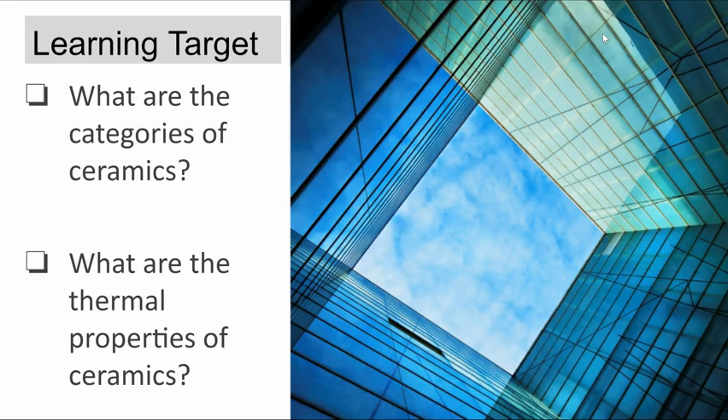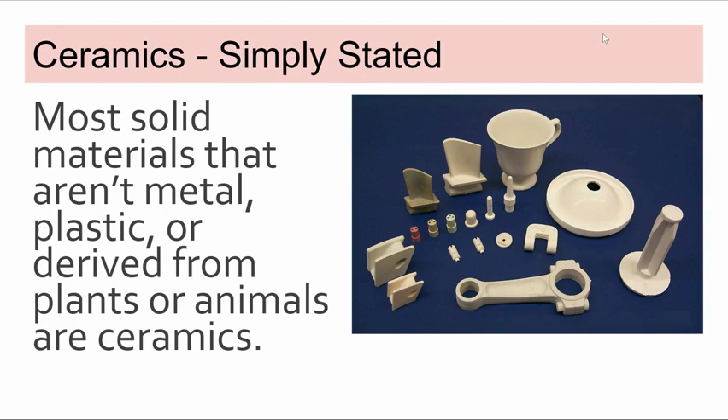So, what is a ceramic? Simply stated, the definition of a ceramic is a solid material that is not a metal, a plastic, or derived from plants or animals. So, ceramics are a vast category of materials, and interestingly, we define them by what they are not.

So, refractories are heat resistant materials that are used for lining the high temperature furnaces and reactors. A great example of a refractory surface is the inside of an airplane engine. The combustion chamber of an airplane engine temperature often exceeds 900 Celsius or 1,650 degrees Fahrenheit. What's crazy about that is that's higher than the melting point of the nickel alloy that is used to make the blades within the engine.

So, how can you have something that has a melting point below the temperature at which the engine operates? Wouldn't the blades of the engine melt? And it is a ceramic coating on the blade, as well as cooling channels cut into the blade that allow it to operate. The blades actually operate in an environment several hundred degrees hotter than the melting point of the nickel alloy. But because of the cooling mechanisms, the metal is never above its melting point, even though the environment is. And so, one of the things we're going to look at is the tremendous low thermal conductivity of ceramics, which makes them really good for the linings of furnaces, reactors, and engines.

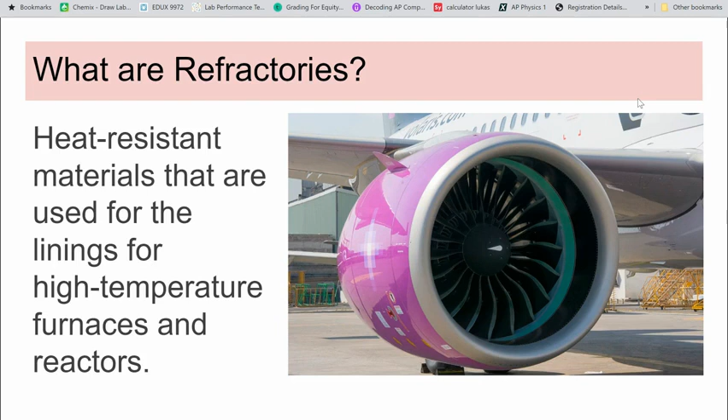Abrasives are ceramics that are used to smooth, polish, and grind materials. So, sandpaper is a common ceramic abrasive. And as the video discussed earlier, the fact that ceramics are incredibly hard is what makes them excellent abrasives. Ceramics and glasses are the hardest type of any solid material. Many ceramics are used as abrasives in cutting, grinding, and polishing, and that is because their hardness is really high. Unlike metals, it's really difficult for dislocations to move through the atomic lattice. And that is because of the ordered bonding between the atoms in ceramics.

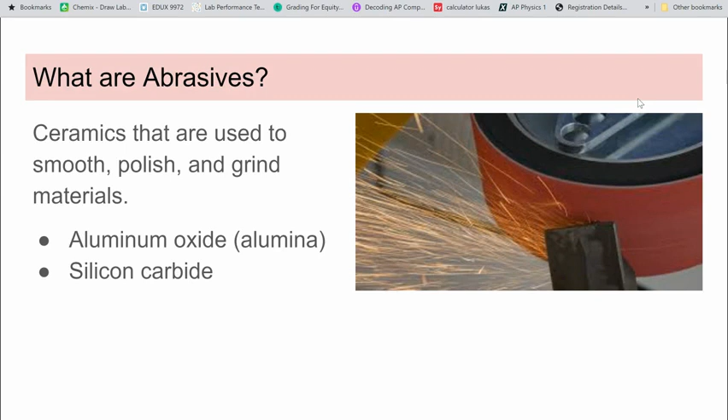So let's look at the bonding that occurs in ceramics. Ceramic materials can often contain both ionic and covalent bonds. If we remember from our previous semester, covalent is when electrons are shared, whereas ionic is when the electrons are transferred from one atom to another.

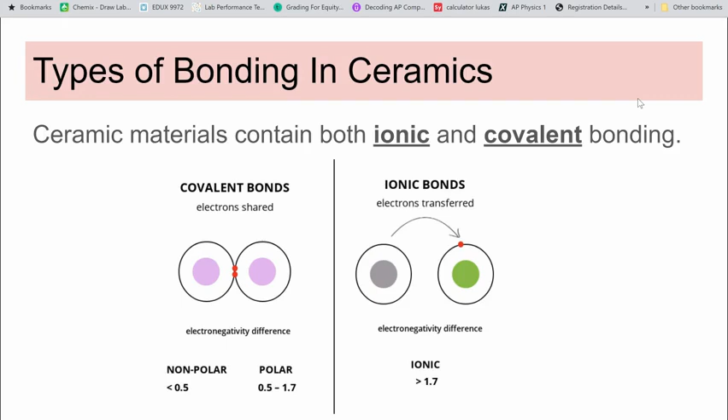And the bond force determines the properties of the ceramic material. When two atoms are far apart, there's an attractive force, and that increases as they get closer. When the atoms get so close that their electron cloud starts to overlap, there's a repulsive force that prevents them from getting any closer together, as shown in the diagram on the left. So the stronger the bond force is between the atoms in a ceramic, the higher your elastic modulus will be, the higher the melting point of the ceramic will be, and it will affect the thermal conductivity, the ability to transmit heat energy through the material, and make it very low.

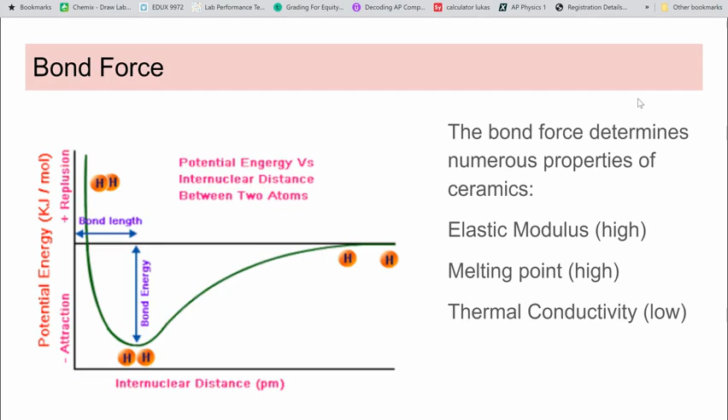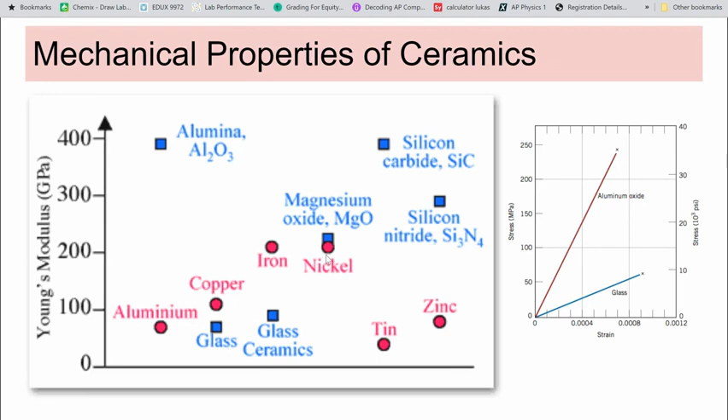So if we look at the mechanical properties of ceramics, we can see that our standard metals, aluminum, copper, iron, and nickel, tin and zinc fall here, and our ceramic material, alumina, magnesium oxide, silicon nitride, and silicon carbide are above it in terms of where they land on the stress strain curve, their Young's modulus value. However, if we look at glass and glass ceramics, we can see that they're in a similar place in terms of stiffness to many of the metals that we've looked at previously. However, they are not as strong as other ceramics.

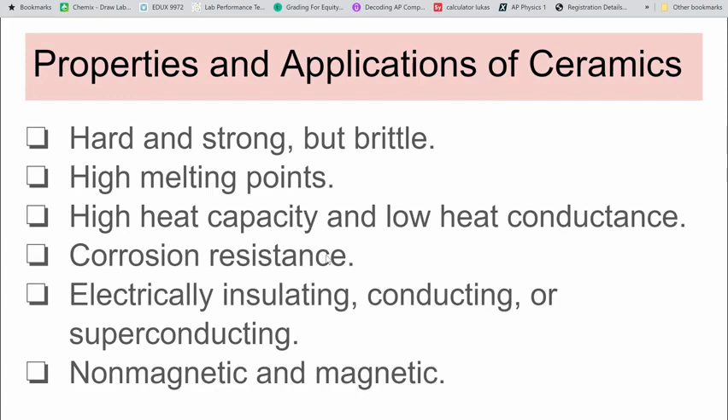So in general, the properties of ceramics are that they are hard and strong, but very brittle. They have high melting points. They have a high heat capacity and a low heat conductance. They're corrosion resistant, and they can be either electrically insulating, conducting, or superconducting, and either magnetic or non-magnetic.

Ceramic materials can be either crystalline or amorphous. Rapid cooling of ceramics favors amorphous, since time isn't allowed for the crystal structure and the orderly arrangement to form. And if a ceramic material is amorphous, that's going to determine the properties that we see.

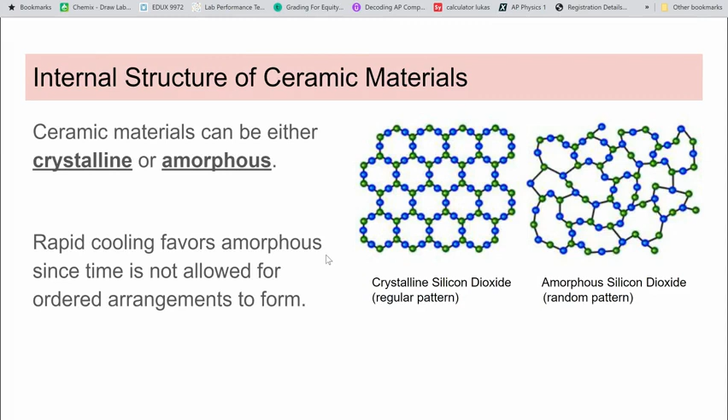And if a ceramic material is amorphous, they tend to have fractures occur in this conchoidal pattern. So amorphous ceramic materials tend to be brittle, and they break or fracture in a way that doesn't follow any natural planes of separation, creating these conchoidal fractures. And that is due to the lack of a structured crystal atomic lattice.

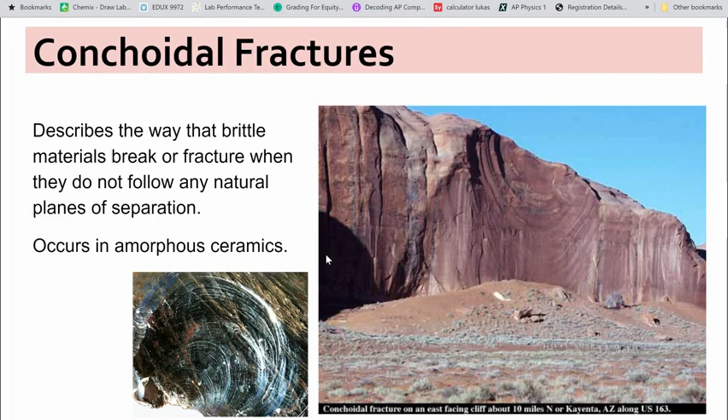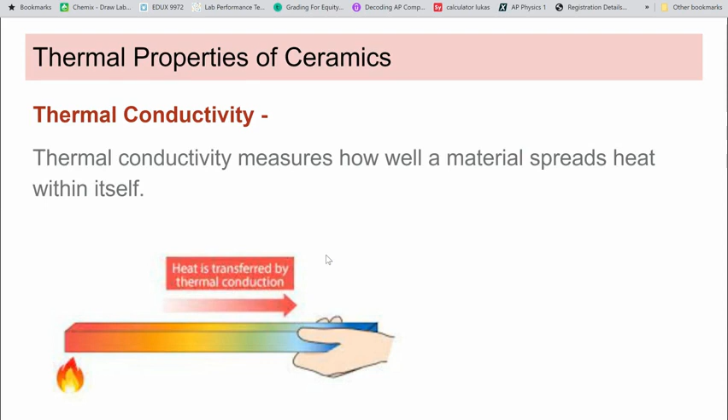So, thermal conductivity in a ceramic measures how a material spreads heat within itself. So we're looking at how heat energy can move through the material when we're looking at thermal conductivity. And if you remember in class, we did a demonstration where we put equal amounts of heat energy on an aluminum rod and an alumina rod. An aluminum rod is metal, alumina is a ceramic material, and we had placed various crayons at each of these numbered spots on those rods to see the rate at which the crayons melted and fell off over time.

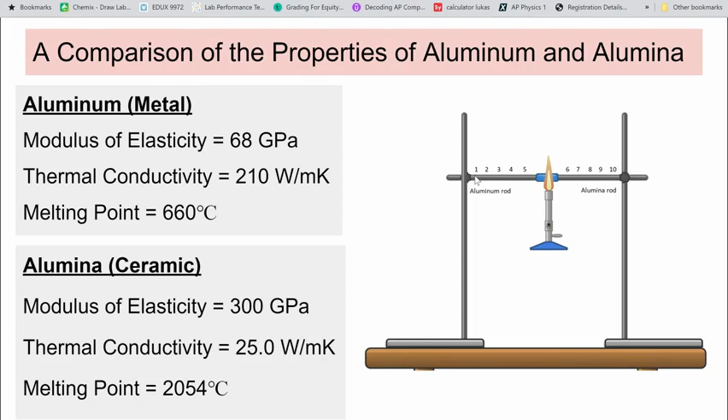And if you remember in our demo, all of the crayons, all the way back to position 1, fell off the aluminum rod because metals conduct heat very well. They're great conductors. Whereas the first crayon at position 6 on the alumina rod never fell off, even after crayon number 1 fell off. And that is because ceramics are very poor conductors of heat energy. They have a low thermal conductivity, which makes them a great insulating material used for things like refractories, furnaces, or engines.

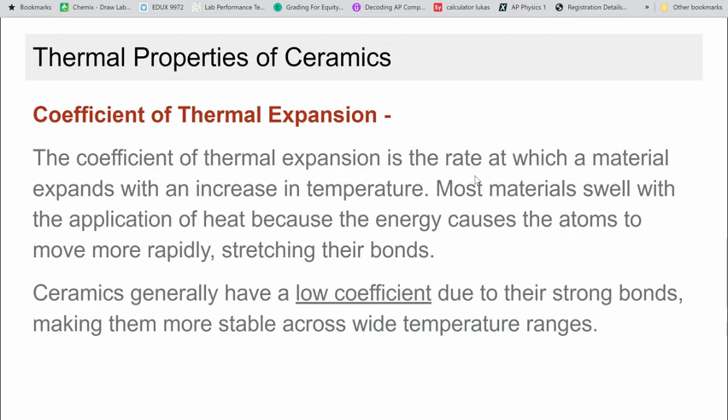So the coefficient of thermal expansion is the rate at which a material expands with an increase in temperature. Most materials swell with the application of heat because energy is causing the atoms to move more rapidly, stretching their bonds. Ceramics generally have a low coefficient due to their strong bonds. That makes them more stable across wider temperature ranges.

If we look at the coefficient of thermal expansion, we can see various materials and their coefficient of thermal expansion, or how much they will expand or swell as heat energy is added to them. And you can see comparison to a couple of metals that we've previously studied, steel and aluminum. So steel and aluminum swell significantly compared to ceramics with the same amount of heat energy input.

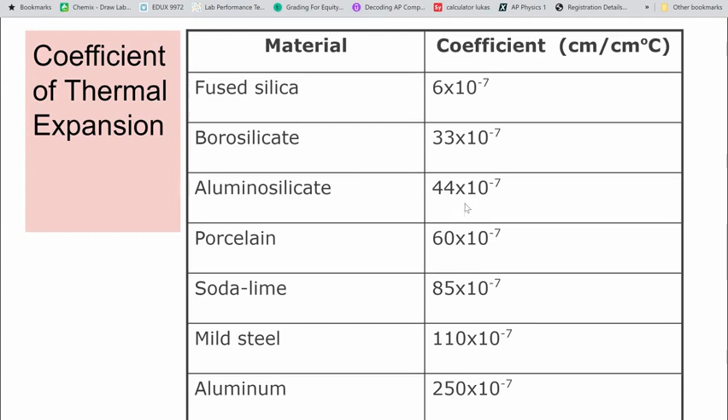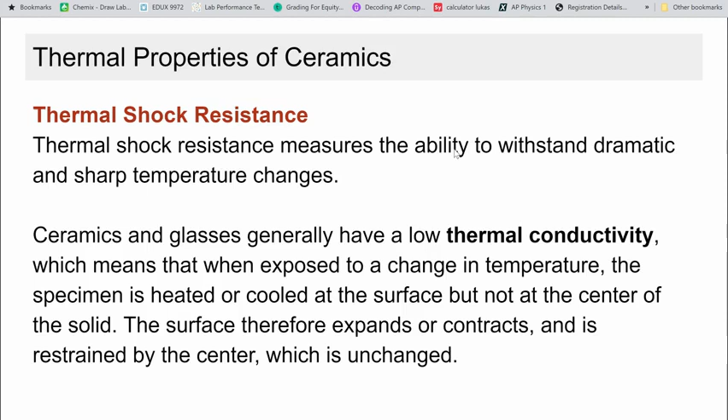Thermal shock resistance is the ability to withstand dramatic and sharp temperature changes. Ceramics and glasses generally have a low thermal conductivity. So what that means is when they're exposed to a rapid change in temperature, the specimen is heated or cooled at the surface, but because the thermal conductivity is not good, it doesn't change the center of the solid. Therefore, the surface of the material expands or contracts and is restrained by the center, which is unchanged. This is why ceramics, if exposed to wide, fast changes in temperature, often become brittle and break.

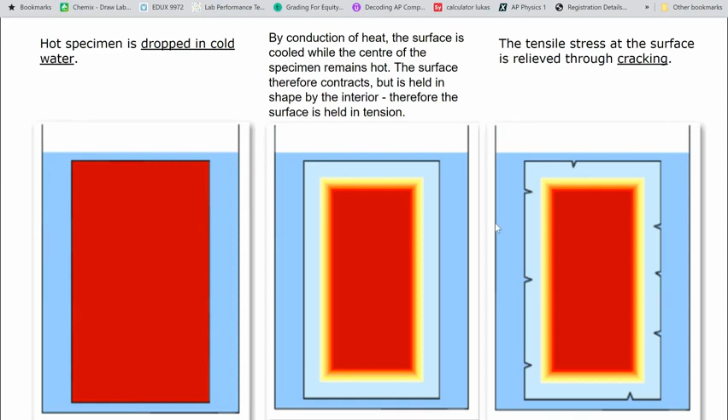So if we look at an example of that, if a hot specimen is dropped into cold water, then the conduction of heat is going to cool the outer material, but because ceramics have a low thermal conductivity, the inner material is going to stay warmer. And therefore, the surface is going to be held in tension. And tensile stress at the surface is relieved through cracking, through the brittle nature of the ceramic.

So to test thermal shock resistance, you simply take a ceramic and heat it to progressively higher temperatures and then drop it into cold water. And we're looking at the maximum temperature that the ceramic can survive before it starts to become brittle and eventually break, right? So spark plugs in your car can suffer thermal shock when the engine is started.

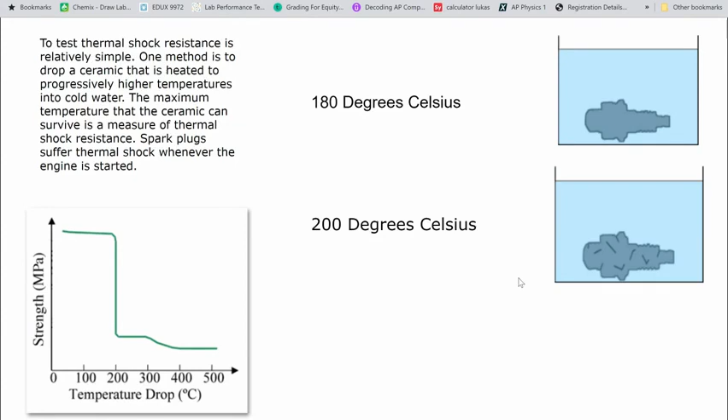And we can see with a spark plug, if we heat it up to 180 degrees and drop it into cold water, we see no signs of thermal shock. But at 200 degrees, we're starting to see that tension being relieved through cracking at the surface. And if we have a 220-degree drop in temperature, the spark plug is brittle and breaks into many pieces. And so thermal shock resistance would tell us that a spark plug can handle a change in temperature up to 180 degrees Celsius. After that, we're going to see damage to the part.

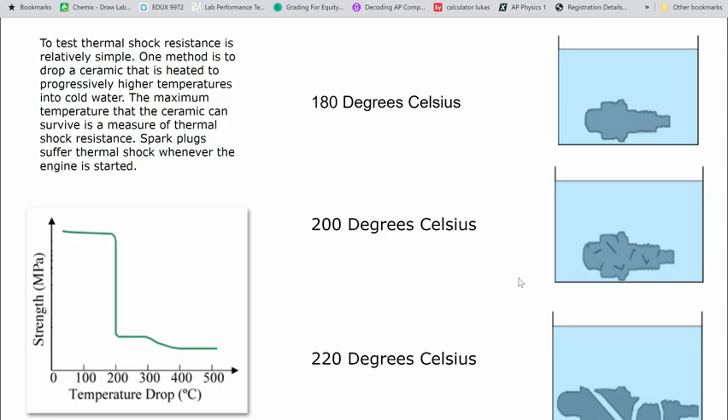So calculating thermal shock resistance is the following equation. We're going to find the thermal shock index, and we do that by taking the tensile strength times the thermal conductivity and dividing it by the thermal expansion coefficient and the Young's modulus value. So let's think about these variables and how they would affect thermal shock index.

The coefficient of thermal expansion, right? The lower the coefficient, the smaller the dimensional changes in the material as heat is exposed. So therefore, it's going to make thermal shock smaller, because if we don't have the material expand or contract as much with changes in temperature, we'll have less tension forces.

Thermal conductivity: the temperature gradient of the material is affected by thermal conductivity. The higher the thermal conductivity in the material, you can transfer heat more quickly and reduce the temperature difference. So ceramic materials that have a low thermal conductivity, because that temperature difference cannot be reduced as quickly, are more prone to thermal shock.

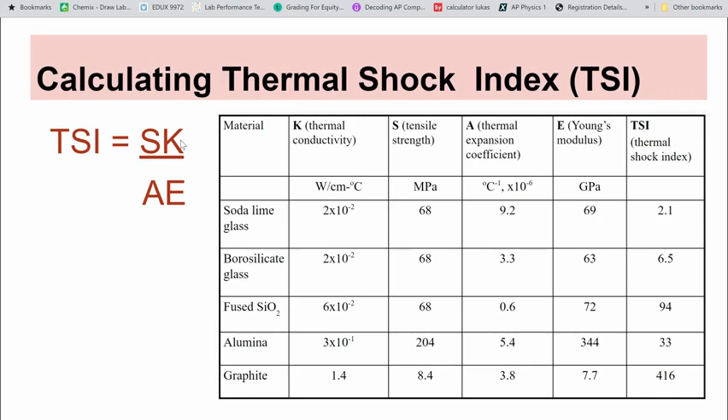So we've talked about direct and indirect relationships multiple times, but I'm just going to remind us that if we're looking at a direct relationship on a graph, as the x value increases, the y value would increase. So when we have an increase in the x value, we see a corresponding increase in the y value. And so we often symbolize that with, as the x variable goes up, the y variable goes up as well

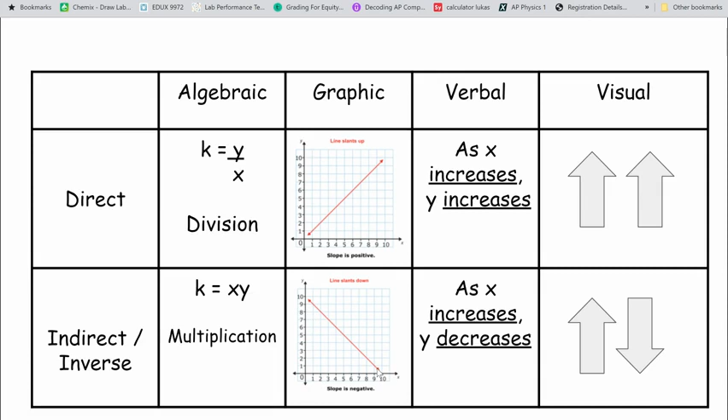at a proportional rate. And an indirect relationship is the opposite. Graphically, when the x value is low, the y value is high. And as the x value increases, the y value is decreasing, right? So let's look at this graph and figure out what's the relationship between the pore volume fraction and thermal conductivity. Hopefully you told me that you see an indirect relationship here. As the pore volume fraction increases, the thermal conductivity of the material is decreasing.

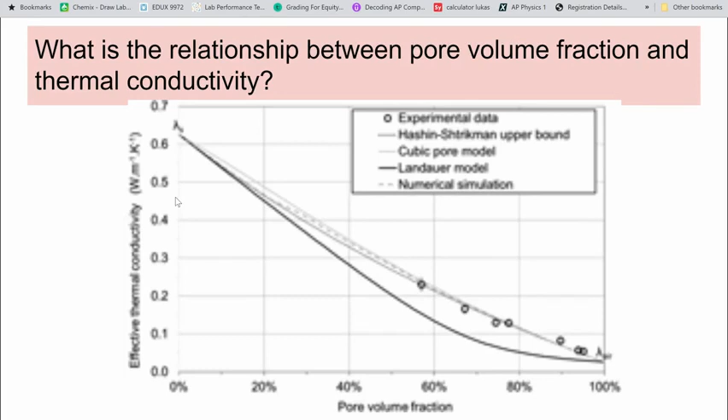Could you take a second and extrapolate from the measured experimental data trend? So let's look at these points here in the trend line that are right along these circular points. What's the thermal conductivity if the pore volume fraction was 20%? So again, I'm going to follow this line of best fit to here. If the pore volume fraction was 20%, then the thermal conductivity would be estimated to be somewhere around 0.46, 0.47, and that would be in the units of watts per meter Kelvin.

So why does a light bulb burn out over time? A light bulb burns out over time because of sublimation. The metal tungsten filament is changing from a solid directly into a gas as it's being used over time. You can actually see that sublimation occurring because when tungsten becomes a gas, it darkens the outer glass bulb of the light bulb, creating that kind of sooty shaded appearance.

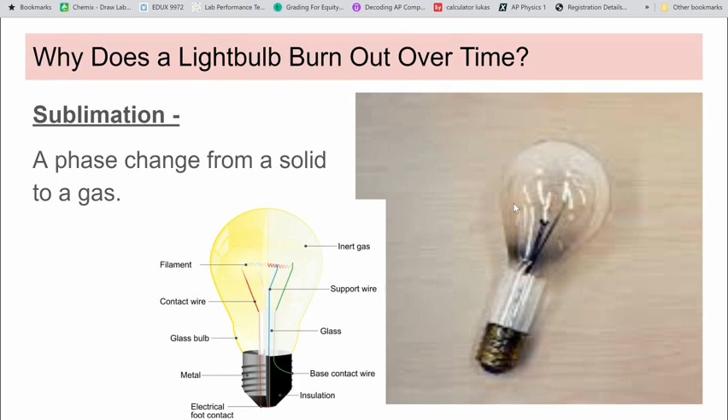When we removed the glass bulb, though, in the lab that we did with light bulbs, we saw that the light bulb burnt out very quickly in a matter of seconds compared to the hundreds of hours they can last for in normal use when the bulb is there. And the reason for that is oxidation. Oxidation is a chemical reaction that takes place when a substance comes into contact with oxygen or another oxidizing substance.

So, our tungsten metal filament, which is at a really high temperature as energy is running through it, was directly oxidizing with the oxygen that it was now exposed to with the glass bulb removed. The glass bulb normally contains inert gases like argon inside, sometimes krypton, although it's much more expensive, to prevent oxidation.

So, since direct oxidation was occurring, that metal material, the tungsten, is becoming ceramic. And ceramics are poor conductors of electricity, they're insulators. So that circuit was getting more and more diminished over time. And eventually, the ceramic becomes so brittle that it either breaks, burning out the light bulb, or the circuit ends because the ceramic is so insulating it stops conducting electricity through it.